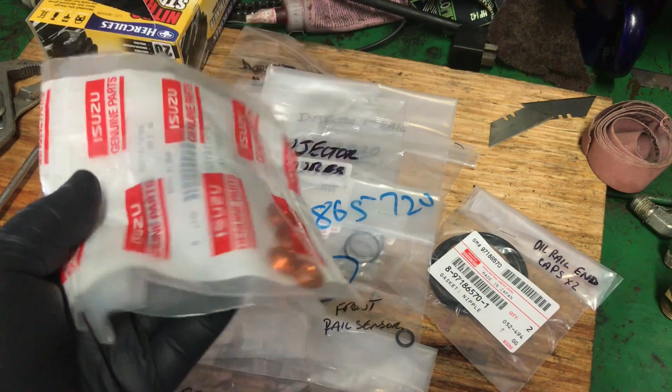There will be a link in the description below as to where I get these from. In Australia, I had a hard time - Isuzu didn't know, or didn't want to know about it. I don't know really, they come from Dubai. It took, like I said, 90 days to get it. I've got every O-ring you can conceivably reseal on it, from the end caps on the oil rail to the drain tube.

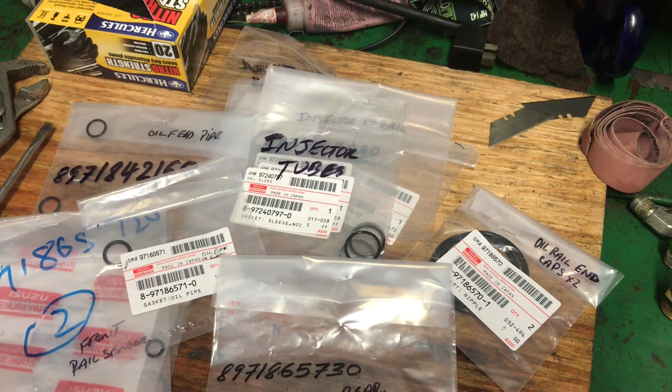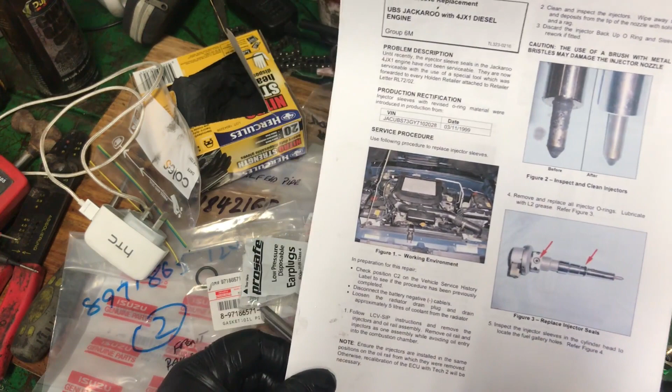So here we go. I'm following this procedure on replacing the injector, or the faulty injector seals. Goes through the whole procedure. You can see there, we'll get down to this page here.

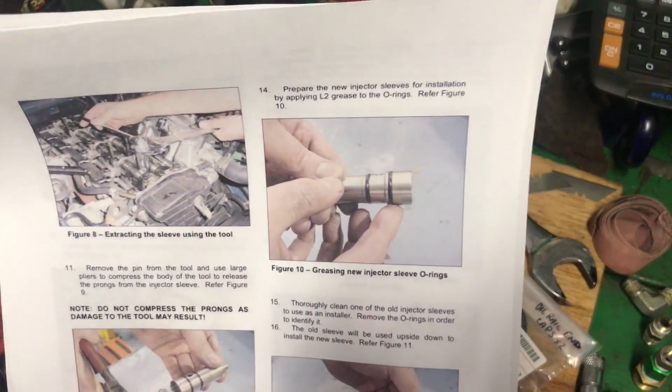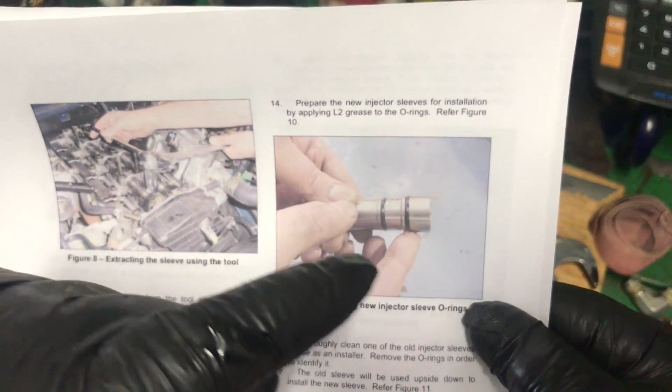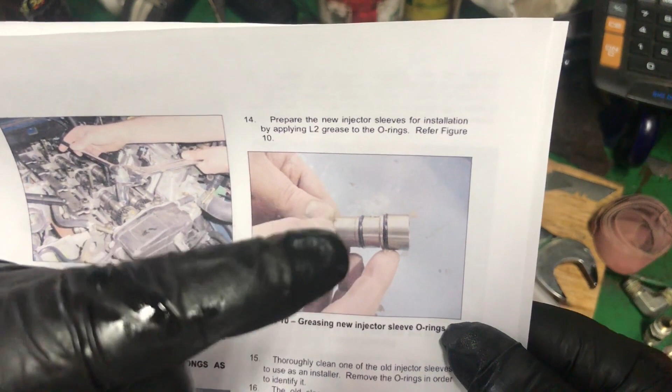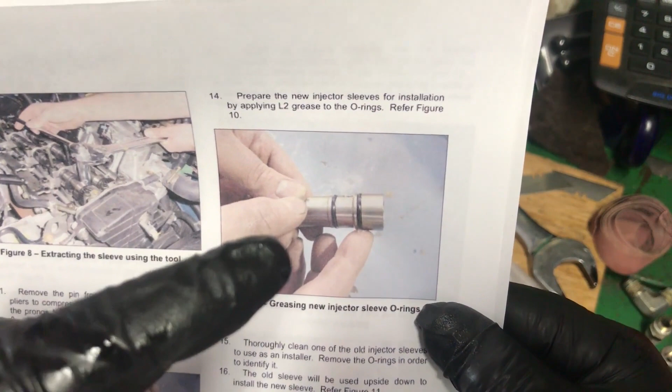That's the main problem that you have, is the injector sleeve O-rings fail, and there's fuel running between the two O-rings, and there's coolant sitting under the O-ring. And I believe what happens is the injector tube overheats when the washers fail on the injector, and you get exhaust gases, combustion gases coming up in and frying that O-ring, and then they mix. They end up with, when it's cold, you'd end up with probably fuel going into the coolant, and then when you get up to temperature, coolant back into the fuel.

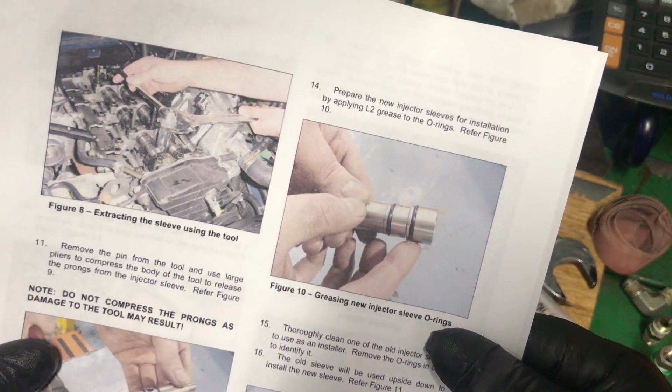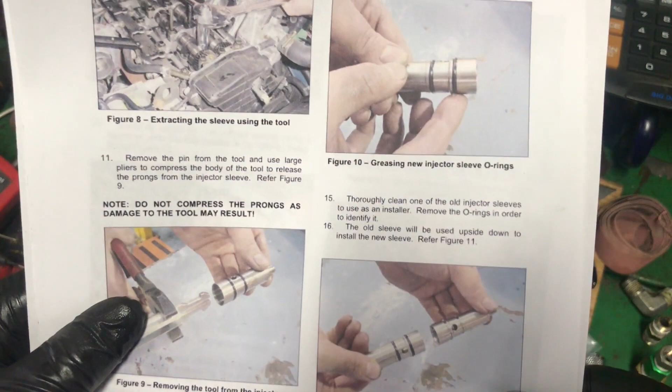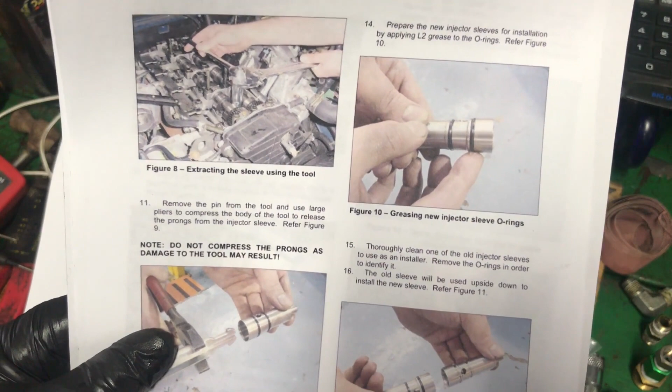And I've had it before. When it first happened, I had drained my fuel tank, and for the first 10 seconds it was green, and my fuel filter had coolant in it, and I also had to replace all my radiator and heater hoses due to diesel in the cooling system, and what happens then is it perishes all the rubber. The turbo is water cooled, so I had to replace all those hoses as well.

Alright, first things first, intake tube from the air filter through the turbo is coming off. Intercooler is already off - if you've seen the previous video, I was chasing coolant leaks. Intercooler's only got 4 bolts, 2 clamps. Take one bracket off this side. The rocker cover comes off. Before it comes off, this steel tube, that's your oil supply line, has to come out through the side of the rocker cover.

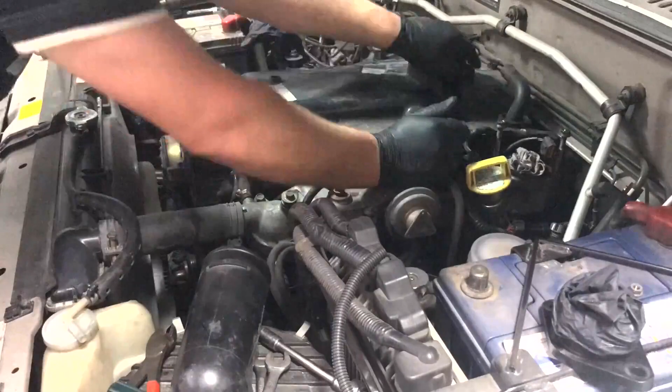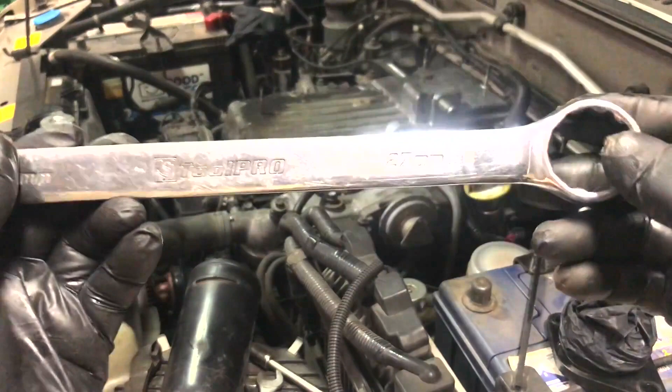Oil pipe, 27mm, both ends, there and down below.

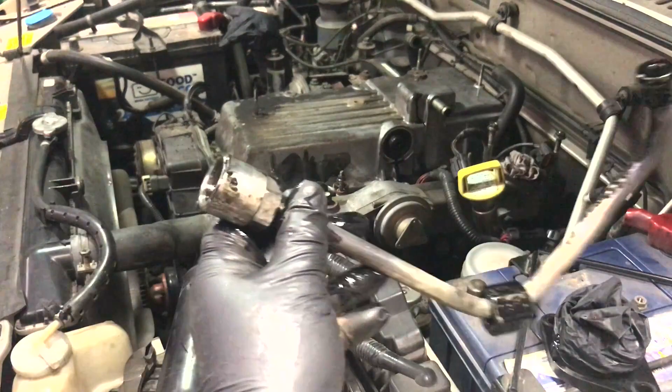Okay, that was very much a battle. There's the tube. What happened was, the reason I had to use Stilson's on here, which it's marked it up, is this wasn't undoing from the inner tube. It was spinning as a unit and trying to wind the adapter that goes onto the rail out with it. So I was trying to spin that whole pipe. I grabbed it there and managed to loosen it. I'll just see if I can source myself another one - I don't trust it, it's an O-ring face. But anyway, you got to do what you got to do. Let's carry on.

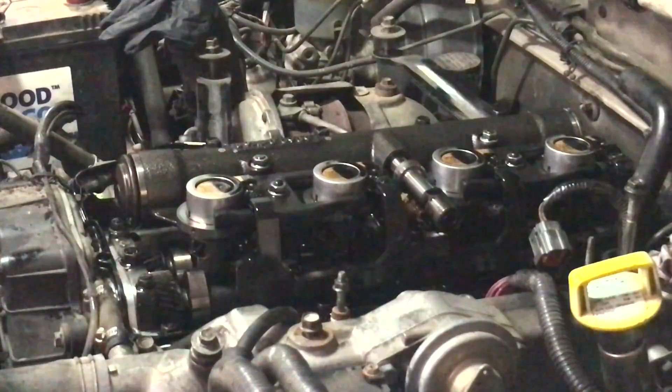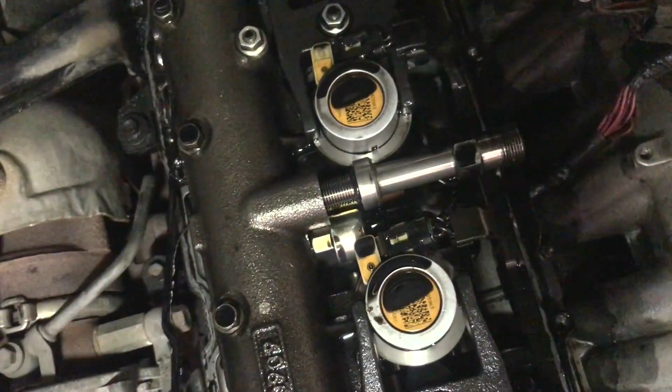Okay, you can see what I meant by that adapter tube poking out, just there, that's all thread. It wound out with the tube, the external tube. So that gave me a bit of grief getting the rocker cover off, because you have to pivot the rocker cover this way, and it was hitting on the turbo tube, coolant tube, so I had to slightly bend it out of the way. We got there. Let me put it in another position so you can get a better look - you can see there the tube has wound its way out when I was trying to undo the whole lot.

Alright, we're going to remove the 4 electrical connectors, 1 to each injector. Then we're going to remove the 2 sender connections, also the oil temp and oil pressure for the rail. And then also we're going to remove the 2 bolts that hold the loom to the cylinder head, and the loom can be moved off to the side.

We're then going to unbolt and remove the bolts out of the rail itself that run down through the top, followed by loosening off all the hex-headed 6mm bolts that hold the injector to the rail, as you see there, just loosening them off, then followed by removing the H-clamp nuts. The H-clamp nuts are on top there, and I've removed the clamp.

Then, once all the rail bolts have been removed, you come in with the lever bar and slowly lever it out as one unit with all injectors intact.

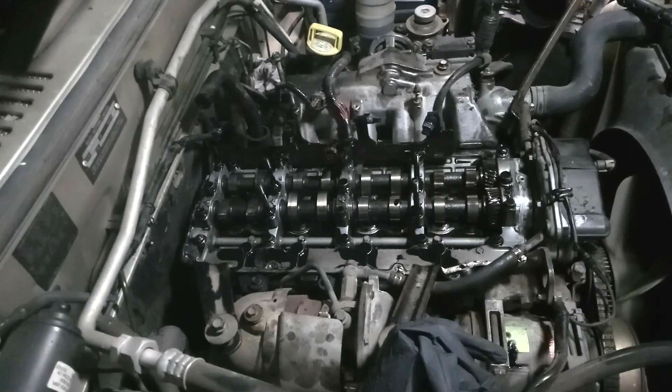Alright, we've got the injectors out in one piece. They're just over the back there, stored away for now. We'll have a closer look at them later. I'll work on draining the coolant now and checking out what these injector sleeves are going to look like as we extract them. You need a puller.

I have a special puller for it. It's very homemade, but works very well. Alright, here's a sleeve from the old cylinder head before I replaced this cylinder head.

And here's a puller, and I'm going to use the puller, slides down into the cylinder head, into the sleeve, like such. They're on a spring, those tabs. Locks in.

It's in that position in the engine. They rest on the camshafts. You wind this nut down, boom, it pops out. And you get a screwdriver and you pop those in, and then you can get your sleeve out.

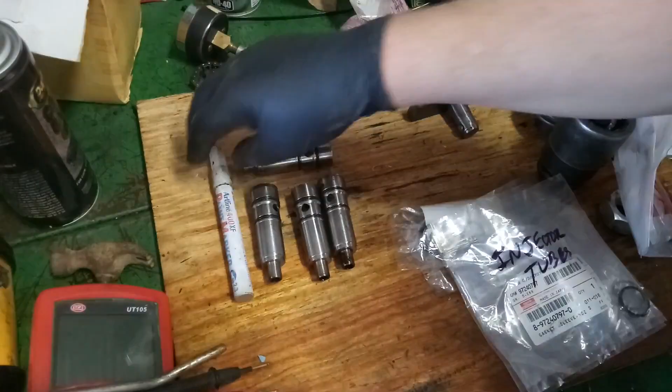We've got our 4 injector sleeves. We're going to put genuine OEM O-rings back on them. I just thought, I got a heap of O-rings as I showed you at the start of the video. I generally just scribble down what each one is for, because they can get mixed up.

Obviously on these they've got the bigger O-ring at the top due to the diameter difference from the top to the bottom of the sleeve.

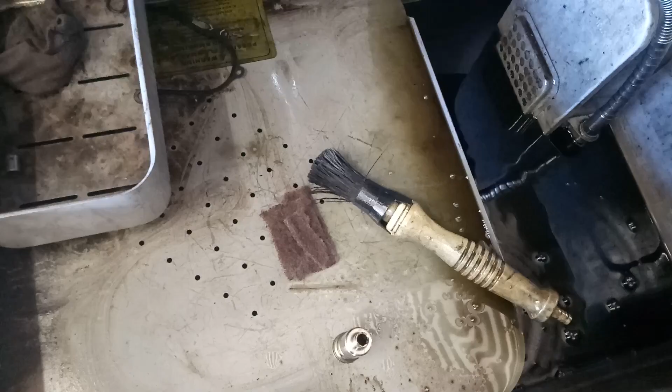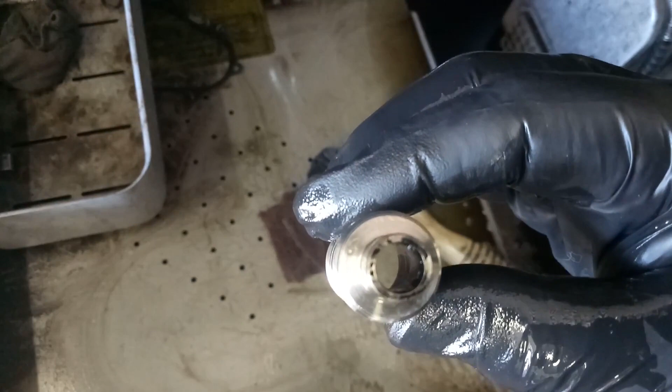I'm over by the parts washer. We're going to clean up a sleeve. The thing that happens with these things is on the very ends, if you'll focus for me, they carbon up internally, and a bit on the outside.

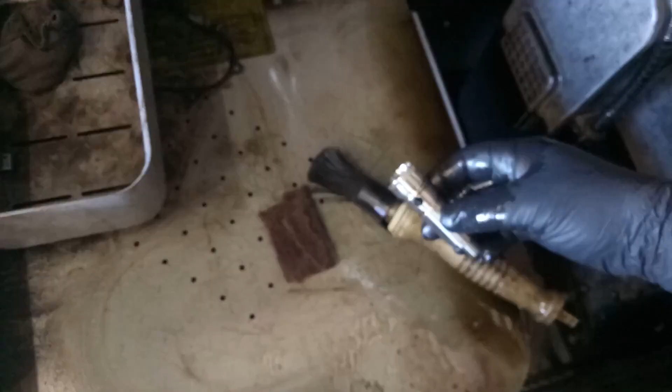I've already wire brushed this part. We need to get rid of that carbon, and also the taper down the bottom where the injector fits via the copper washer. We need to make sure that's clean. I do that with a basic rinse. From there I get Scotch Brite and run through the middle of it.

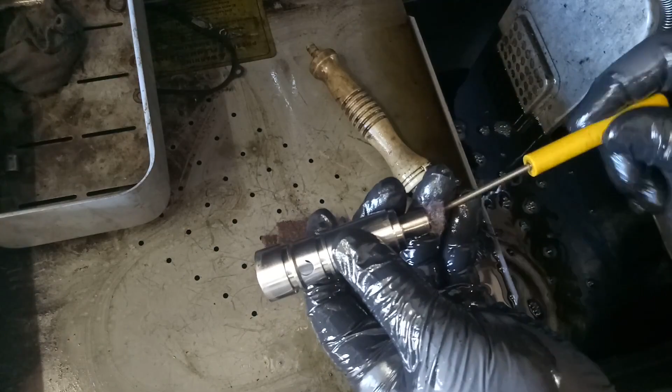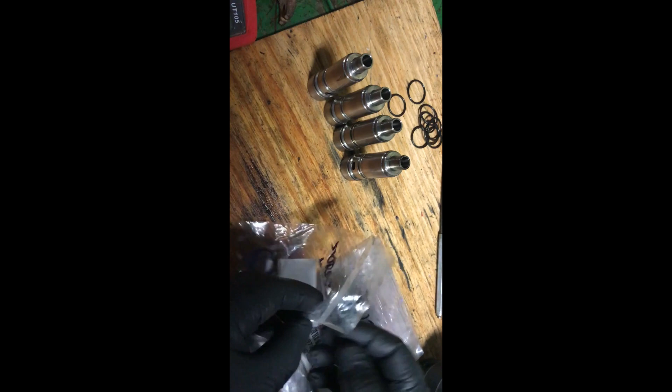Alright, let's fit these O-rings. You've got the two different sizes. Obviously the smaller one at the bottom, the larger one to the top. You can see the size difference there. Top, bottom.

I bring them up from underneath. Do the top one first. Obviously you can tell it's not going to fit when you've got a big gap like that in the O-ring. So it's definitely the top one.

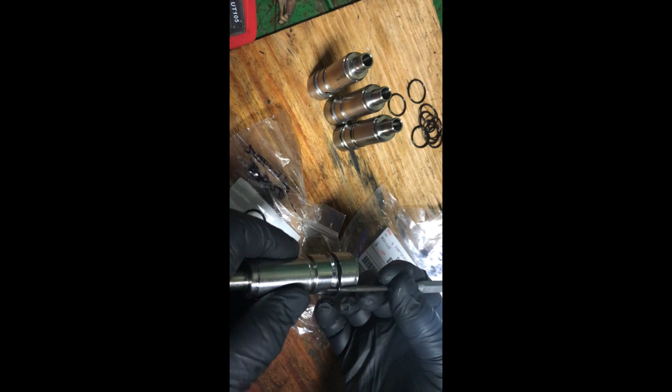What I do with these, people don't sort of do this, they just roll them in there and just slap them in, but to me they're still twisted. You need to get like a fine pick. I pinch the O-ring up a little so you get a small gap. Go underneath the O-ring without damaging it, and run around like that, and it unwinds any dramas.

And you can actually spin it as well. Also a good trick for doing cylinder sleeve O-rings on diesel engines that are O-ringed.

And this is the bottom one. You can roll it up, it's no drama. Same thing, just squeeze it up, over the edge of it.

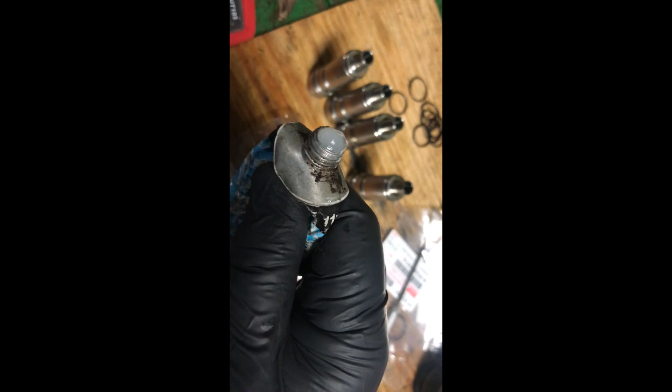Done. I use a lubricant, you can barely read it anymore. It's a valve and O-ring lubricant. It's just like a clear petroleum jelly type stuff, I suppose.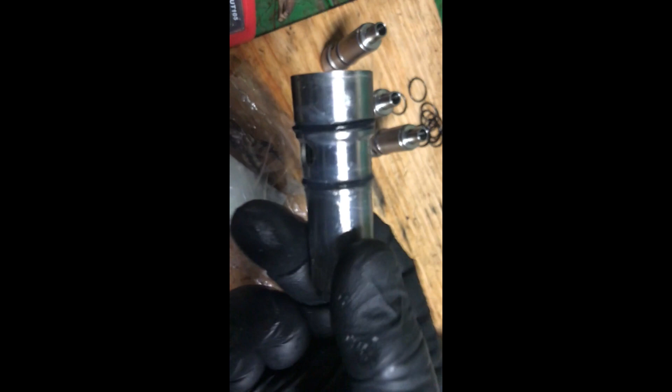Okay, all the O-rings are on. They're lubed up with that valve and O-ring grease.

So we'll now install these. To install them, you can do it as the procedure shows with another older injector sleeve if you have one. If it's a good injector sleeve, you can get an old one, sit it on top, and use it as a drift to install the sleeve. But I don't have any of those. Well, I do, but I'm not going to use them because that's just wasteful of another good set that I don't want to damage. So I'm just using this.

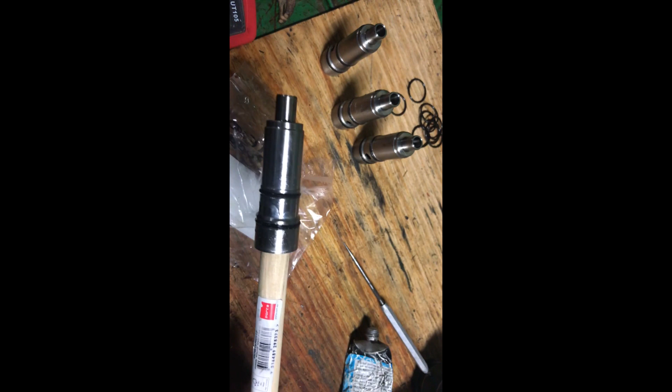It's a 16mm piece of round dowel, just from Bunnings, the local hardware store. This actually fits just nice, and it's resting just there on the inside. I'll just cut it to length so I have enough poking out.

I can hit it in with a hammer. You're not going to damage anything. A little bit of wood falls out and falls down the hole into the cylinder - it's not the end of the world.

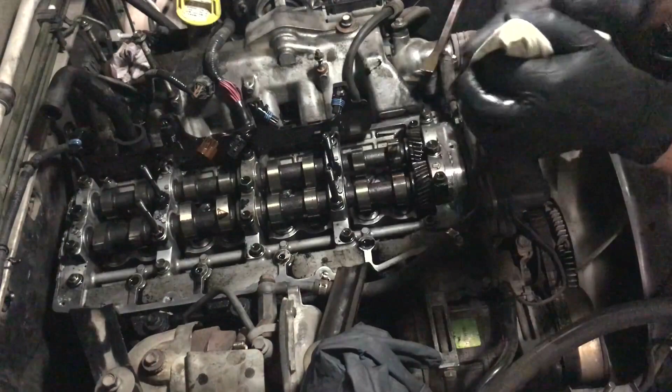So we'll go and clean the head up where these seal in the head, and let's install them. Let's clean these holes out. I'm just using a piece of that same dowel and a rag. You'll have to excuse the light if it reflects back at you, but I'm getting old and blind and I need to put this down here. Clean out any rubbish.

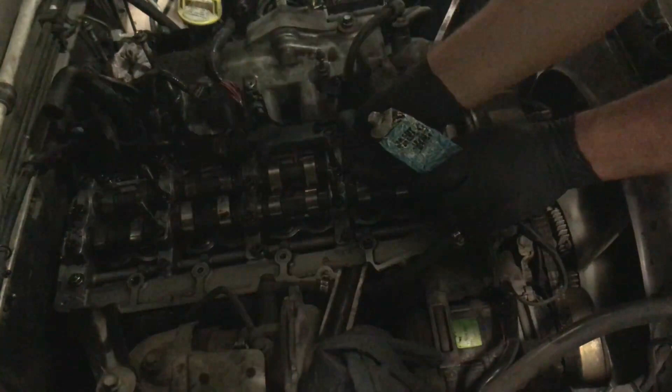Alright, we're going to lubricate the cylinder head sleeve holes. Same grease, that rubber O-ring grease, and you can just reach in there enough. You only really need to lubricate the top half - as the O-ring slides down, it'll drag the lube with it. I'll just do the front one, same thing. This is exactly the same piece of dowel I use for cleaning out the holes.

Here's the first sleeve. Now you need to have these holes lined up straight down the engine. So if I'm looking at the engine this way at 12 and 6 o'clock, the holes have to be that way. If you put it in that way, where the holes are at 3 and 9 o'clock, you'll block the fuel from going through. The fuel needs to transfer through that direction, through the drillings in the head, all the way out to the back. The fuel comes in just under this manifold in the side of the head, all the way through the drillings in the middle of the head and out the back to tank. So you need to have those at 12 o'clock as I'm looking this way, and 6 o'clock. It doesn't matter which way, that way or that way, but as long as it's that orientation.

If you've got genuine ones, they've got a notch there and there in the 12 and 6 o'clock position - this one's not genuine. So all you do is put your sleeve in. Like I said, you can sit it in there and then have a look at your holes.

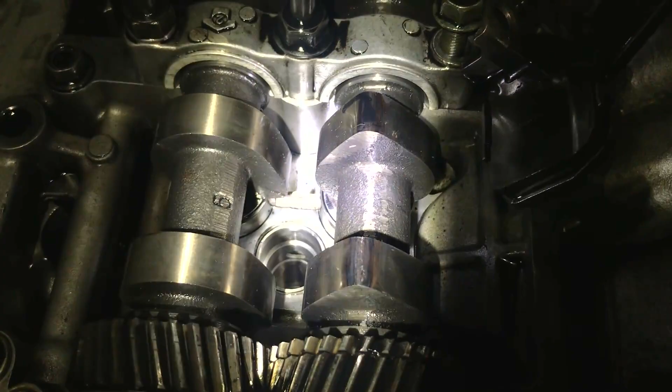As you can see, the sleeve is in there. You can see that drilling hole there in the sleeve - it's actually running straight down the engine. I'll bring you the other side. That's the 6 o'clock from where I'm standing, that's the 12. It runs straight down the engine. That's how you have to have all 4 of the sleeves.

Okay, you've got to have the sleeve installed 15mm down. So you've got to measure it from the top of the head to where the sleeve actually finishes up, the top of the sleeve, because they don't fit flush on top. What you saw before in the last shot was just that sitting on the first O-ring before it gets installed. So you just grab this and this, put it in here. And that has now technically been installed. And we take a measurement.

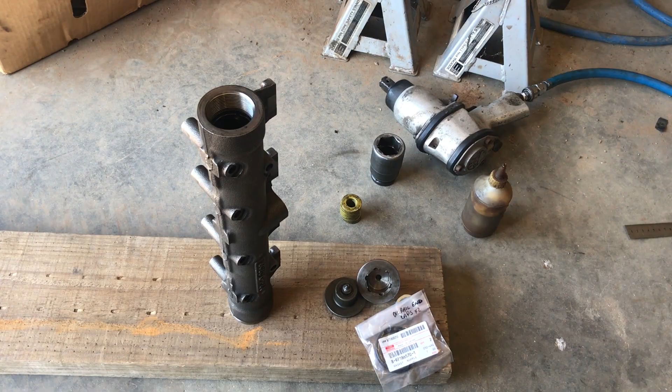Okay, we're going to move on to the resealing of the oil rail. I had to make a tool up to undo these end caps. They've got this, how would you say, 6-point special tool needed. I ended up making one out of a basic nut.

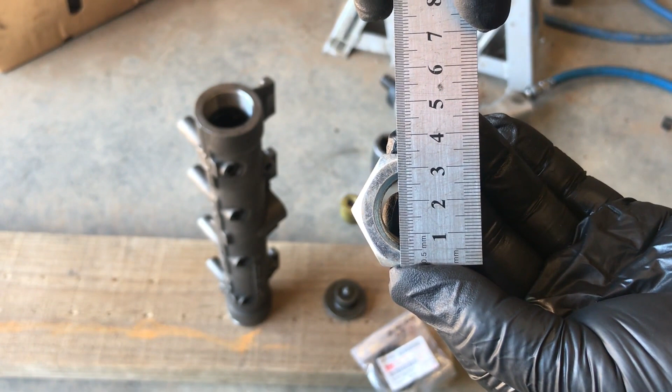I think it measures, let me get the ruler. 35 across the flat. I think it's a 20mm threaded internal, something to that effect.

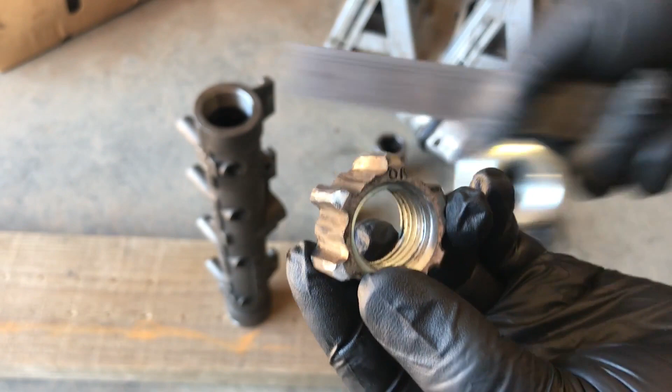That turned into this horrible thing. All I did, you can see from here, is I left the corners on and I scalloped the inners with an angle grinder, as you can tell. Does the job, because I've already pulled it apart off camera - I had no idea if this would work, and it works good because these caps are very tight. You can see it's marked it a little, but really it's better than using Stilsons.

I've heard people using Stilsons on the edge, and this is what it looks like when they're on there. You've got sort of no way of biting it unless you put it in the vise.

All I ended up doing was putting it down there on a piece of wood when this cap was still screwed on it tight. I've got another piece of wood on top, give it a whack with the hammer, and then installed that into there.

And I use, I think it's a 1 3/8 socket, which is not the right socket. It'd be metric obviously for that. That's all I've got, 1 3/8. I loaded it with a handful of washers, 5/8 washers.

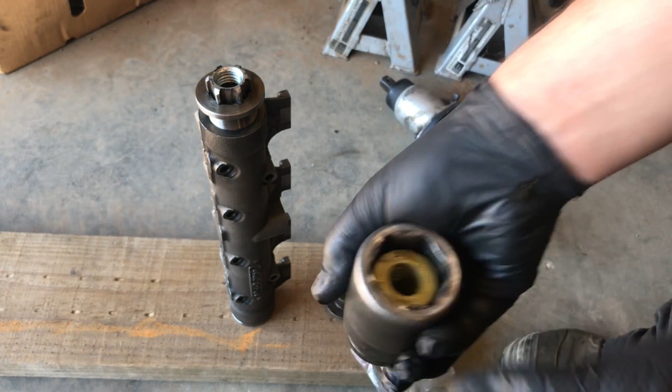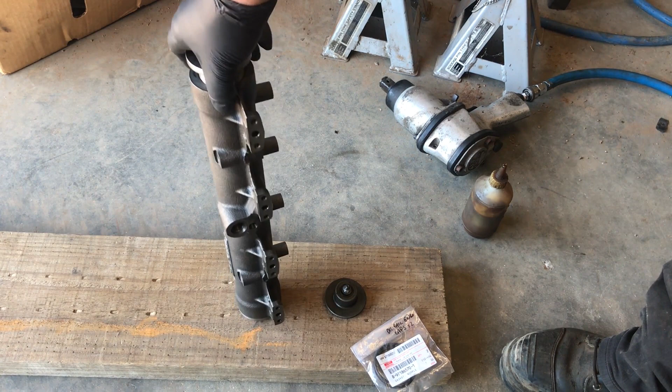Now it sits above proud, so when you go to put it on, you've got that effect. The O-rings are on the caps, and we're going to reseal the whole thing. As I said before, the 2 sensors, and also where your oil rail goes in and your drain plug.

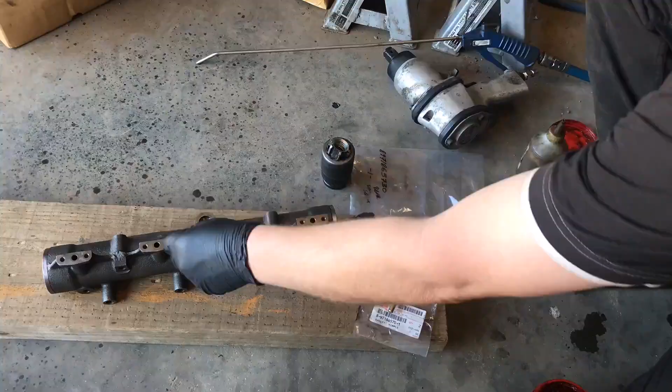We've got all the sensors, drain plug and 1 end cap done up. I'll just show you how this tool works. If you don't like it, yeah, well, it doesn't really matter, does it? It's the way I'm doing it. That's all I've got.

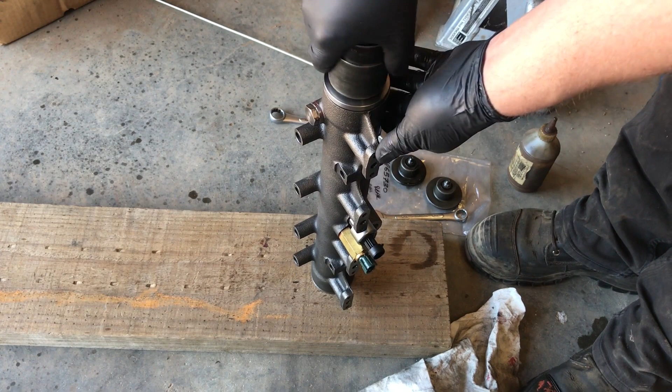I'll just give it a couple of rat-a-tat-tats on the end cap and that's it. It's a 3/4 gun, so it's not exactly weak and you don't want to overdo it. So basically I take the socket off the gun, have everything loaded up, put it on. If you don't do it right, you end up with all the washers on the floor like I have done in the past.

As you can see, it's loose, hand tight, gun going the right way. Sort of half straddle it and hang on to it. And give it a couple of whacks. That's it. We're done.

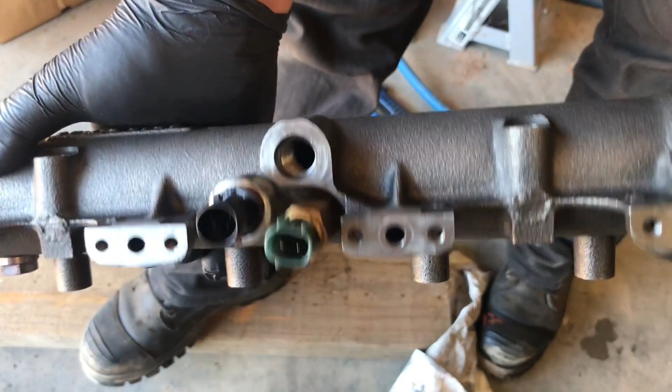Said sensors, drain plug. I've still got the adapter to screw in here, but we'll do that in a minute. One thing I forgot to show you is that once the end cap is on, you actually have what they call a vibration dampener that screws into the end.

That is a rubber mount that insulates or isolates the bolt and the body of the injector rail, and that screws into the end cap. That acts as a vibration dampener. Apparently, I presume that's what it is. The book refers to it as that.

I'm just going to put a little bit of Loctite on the thread because that's what was on it when I pulled it out. Don't know the torque, the book doesn't tell me the torque. Standard torque's around 25 Newton meters when we'll nip it up there.

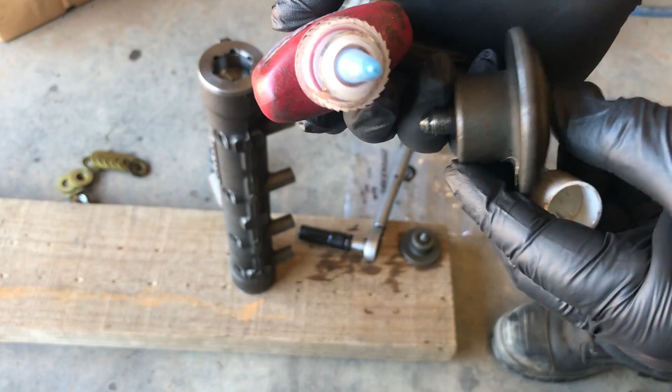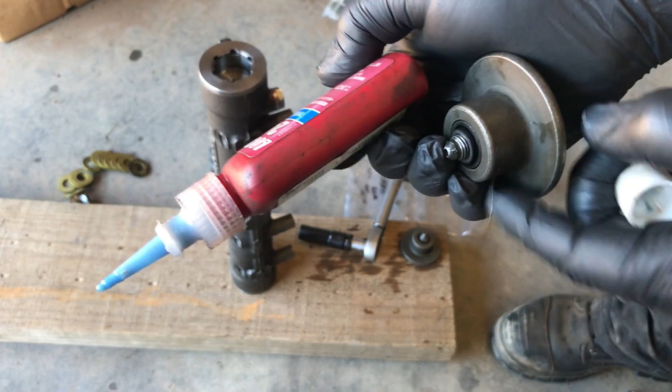That's it, as far as I'm concerned. I'll rub it into the threads. That's it, just got a nice blue thin film.

You can smell Loctite, it's definitely got a scent of its own. When you undo it, you can definitely smell it. I would say this has never been apart before.

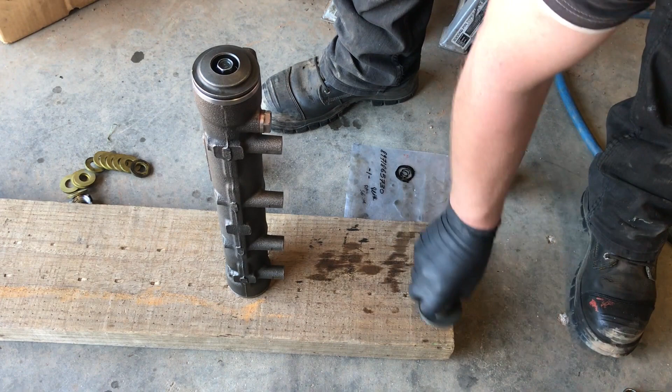Okay, might lay it down. Biggest thing is not to break off or snap any sensors, because they're worth a pretty penny. Very much so.

Do the other end. When the stuff bites in, the only way, if you've got a bolt stuck, if it's in an area you can heat, it will melt. Other than that, you're pretty much screwed if you can't get heat into it and you've got a rounded off bolt or whatnot.

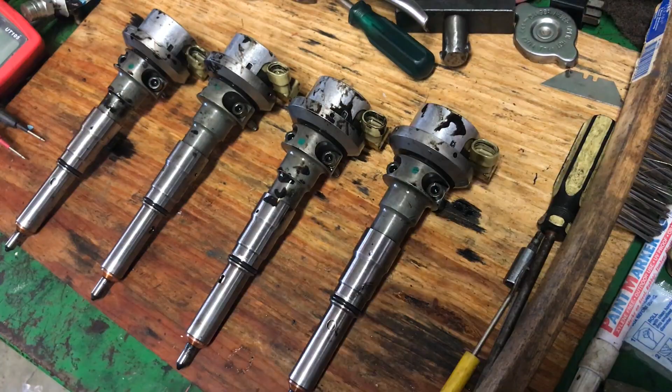There they are. Alright, we've got our injectors. We need to change the copper washer and also the O-ring. Also give them a clean around the nozzle itself. We'll have to probably get most of that carbon you can see there off before that copper washer will come out.

Normally just scratch it back. I try and keep away from the nozzle itself. I just want to go here and scratch this off.

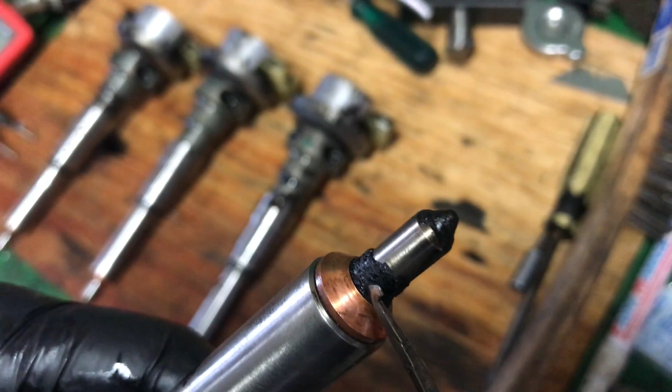This hasn't been in here that long, these injectors, so they're not too bad. When I took them out the first time, they were very crusty. You get the idea, we'll clean them up. These have been compressed pretty tight, so they'll battle a bit to come off, but we'll get there.

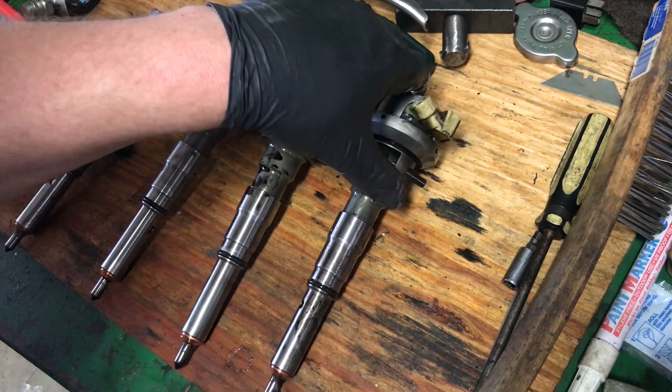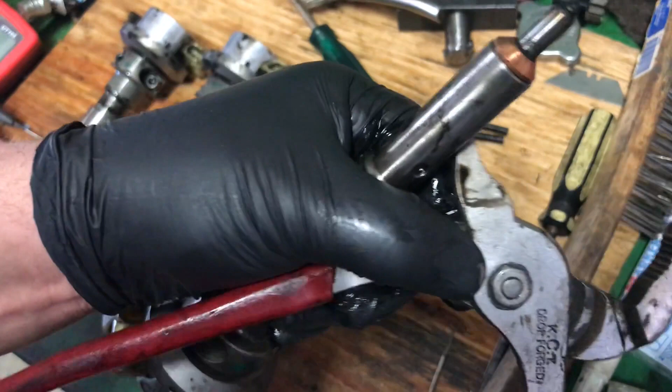The way I normally get the washer off is I grab a set of multigrips. You set these so you just get enough bite only on the washer, and give it a spin if you can.

There we go. Spin it and pull it off, and there it is. It's a tapered washer.

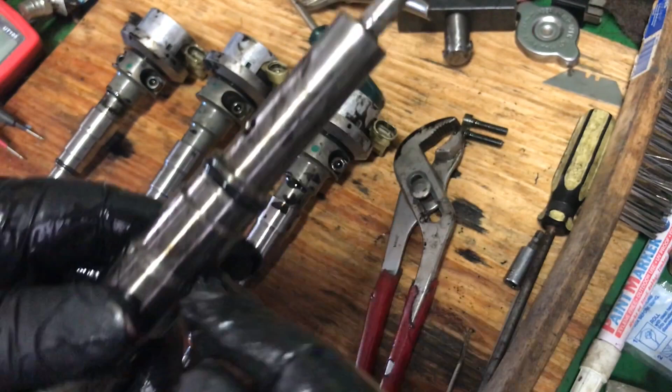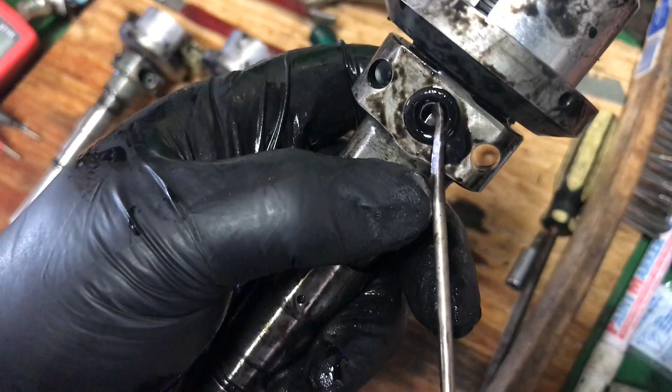Pop the O-ring off and clean them up. Let's do the rest. Also, there's an O-ring that sits here - that's your inlet for your oil to actuate the injector.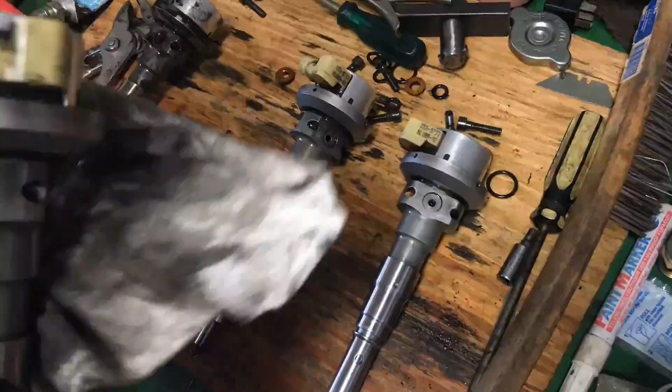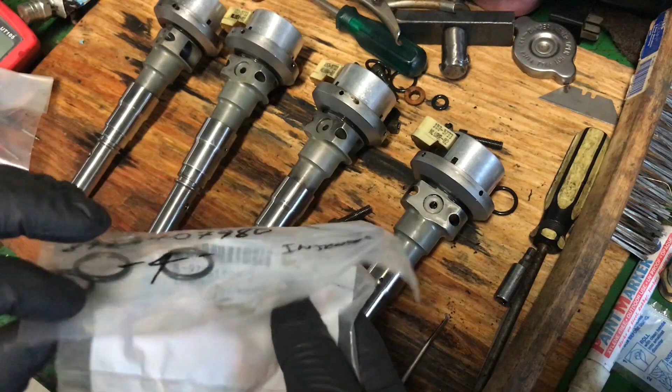We're going to put some new washers and O-rings on, and then we'll bolt it to the rail with new O-rings as well. Yeah, let's do it.

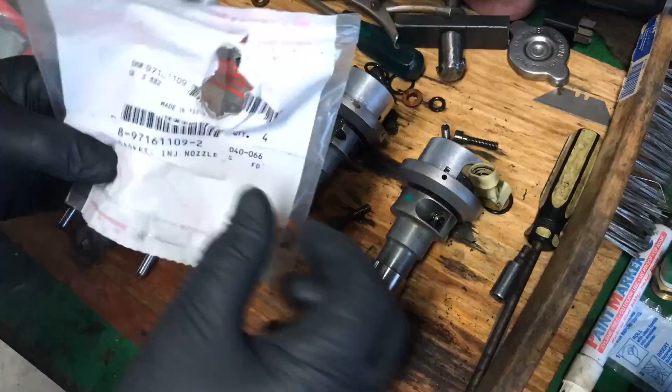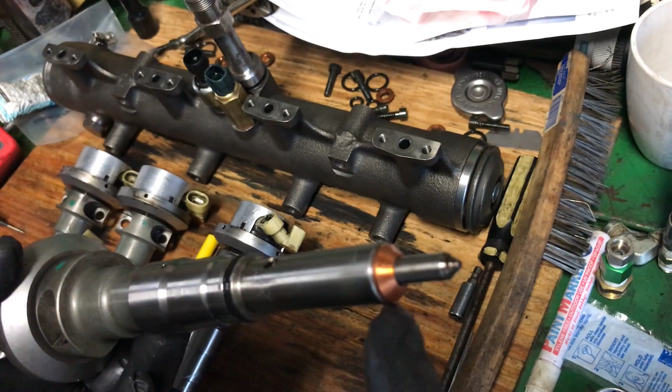Okay, we've got our O-rings on, lubricated. They say in the procedure to put these down the hole and then drop them in, but I don't, I prefer to just stick them with a little bit of lube, and they're stuck on there, they don't fall off. Anyway, you can comment as to how I should or shouldn't do it, but that's okay, I'm doing it this way. I've done it before successfully.

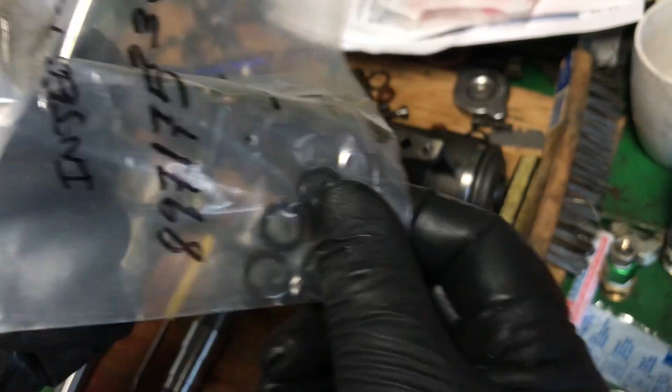Even with eBay O-rings. So alright, we're going to loosely fit each injector to the rail and use OEM O-rings, if I can find them. These fellas are a square cut O-ring. If you buy the eBay ones, or aftermarket ones, they turn out round. The genuine jobs are definitely a square cut.

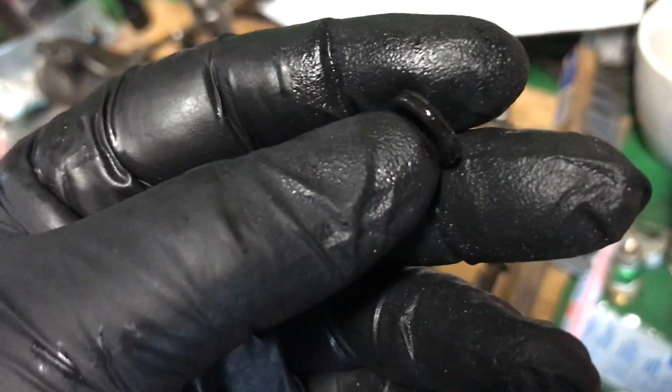If you have a look at what I took out - round. This one - square.

You can see there, it sits nice and proud. With O-rings, you'd think the prouder the better. No, you can actually blow an O-ring quicker if it's too big than if it's too small. Basically, that's a nice height there.

Little Allen key bolt either side. If I don't drop it, a little bit of lube in the O-ring, or in this case I'm just going to put it on the mounting surface. Put it on there.

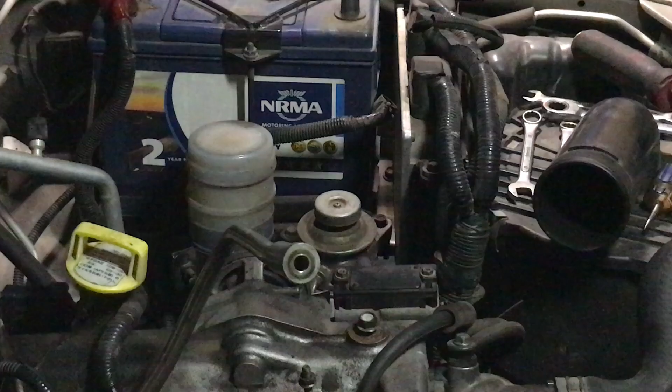I'll get some zip ties and zip tie them in. Okay, it says to put 300 ml of oil into the rail, and if you look down here, I've hooked up my pipe back to front and it's sitting up in the air, and I'm going to use a syringe and induce 300 ml, hopefully 300 ml anyway. This might take a bit, so it might be time lapsed.

We've filled our rail up, and you can probably see, I don't know if you can, the light's pretty terrible here, sorry, but it's about midnight here at the moment. I've had to zip tie 1, 2, 3 of the connectors on due to the fact that the little clip that holds them in place broke, but it's alright, I'll sort that out. I need the vehicle desperately, so we're going to put it back together like that for now. I'll order in some new ends, or maybe a complete harness.